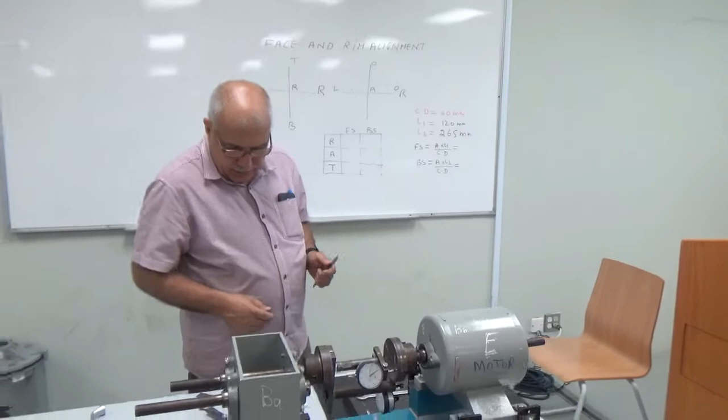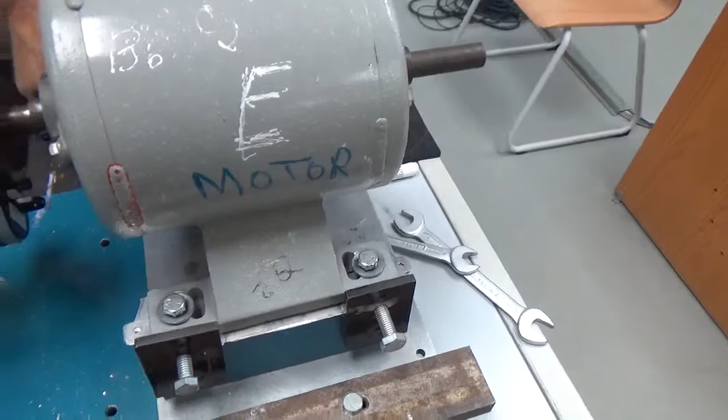For making alignment in the horizontal direction, what we will do is open these bolts here, all the bolts, so that the motor can move forward and back side. Which bolts? These are the four bolts. These should be all loose so that you can move the motor forward and back side.

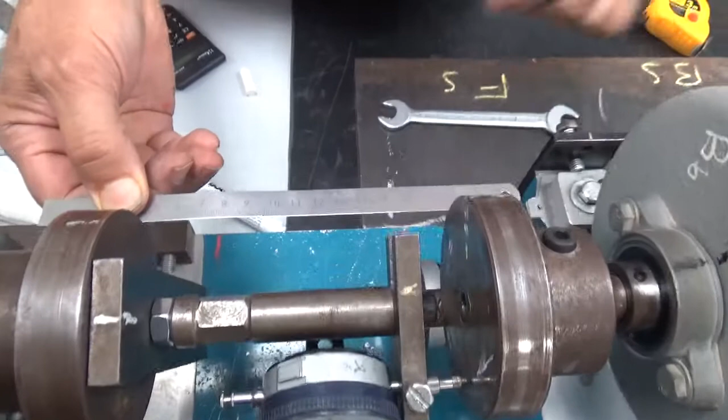After this, you will make here rough alignment. You can see here that I have already done the rough alignment. This is the rough alignment now.

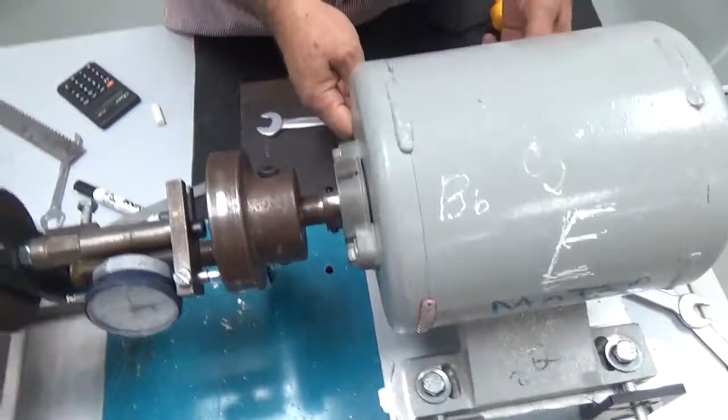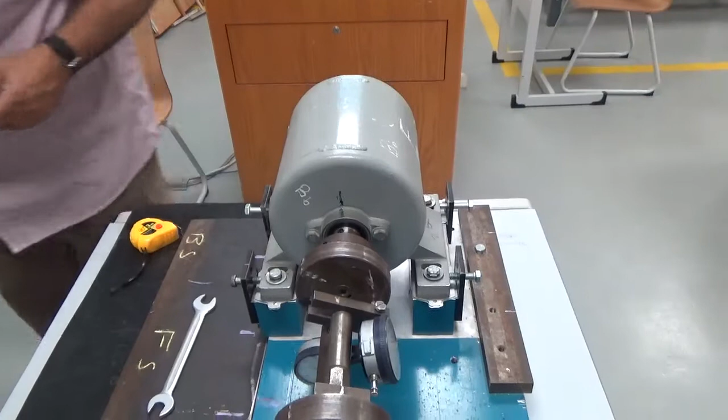After this, I will touch these jacking bolts so that the motor stays in this position. The motor should not change from this position. After this, I will just make this little tight, these bolts, so that the motor does not change its position.

No need to tie too much, just tight a little bit. Okay, now you have just tied them a little bit.

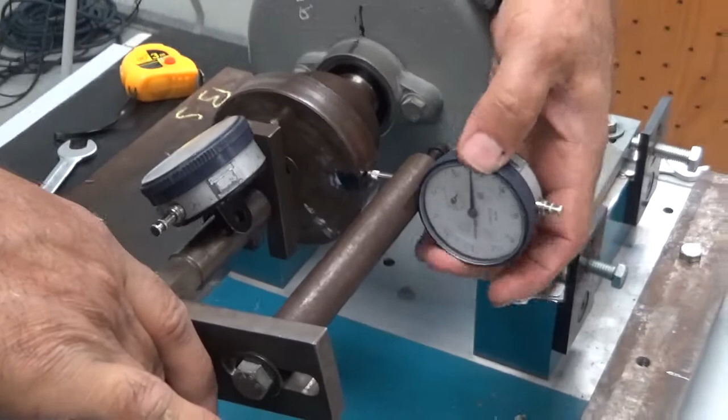Now I will take the readings. I start from the rim reading. I will make this 0 here. This is 0, you can see here. This one is 0.

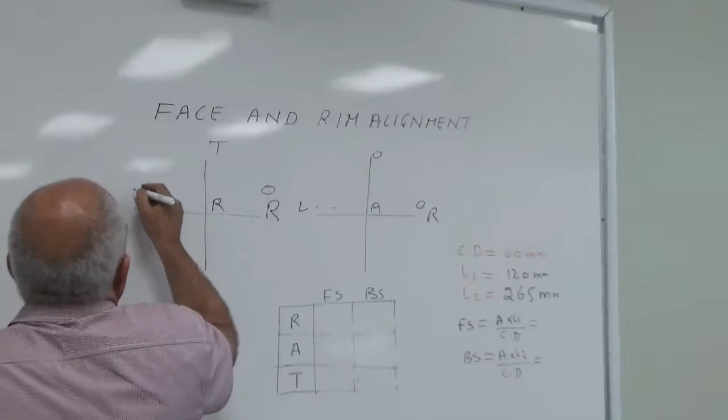I will come to this side towards me. This is now 100. This is 200. And this one is 250. This is 250. So this one is for 0 and this is 250.

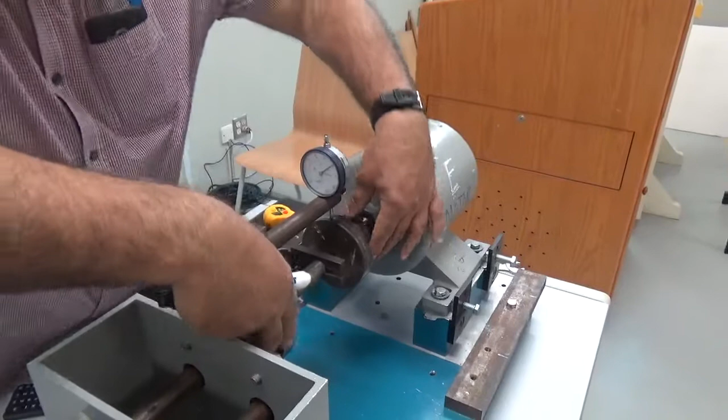Okay, so this was our radial reading. Now we will take angular reading.

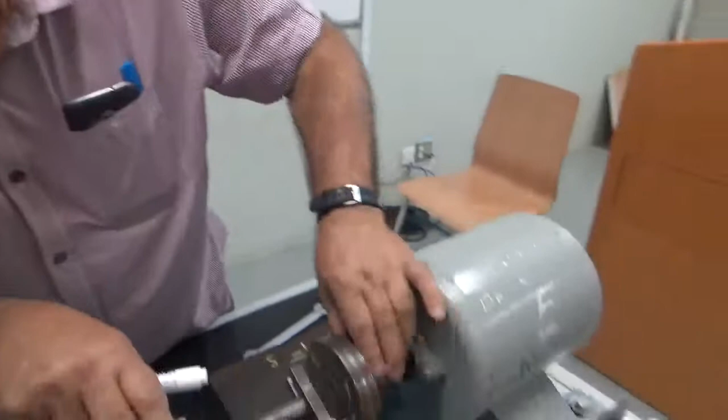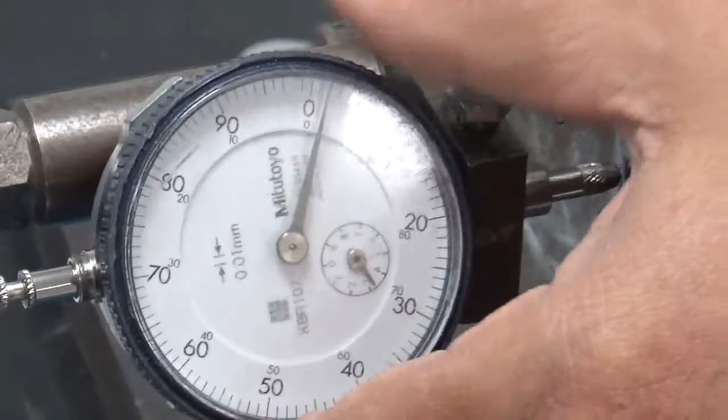This is our 0 here, and we will come to the opposite side. And this is plus 25. So this is plus 25.

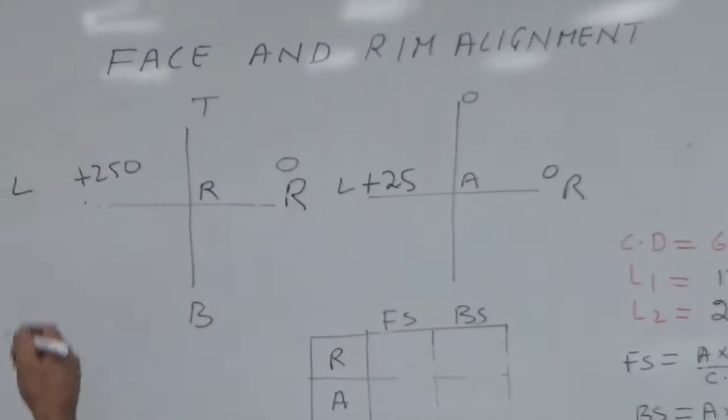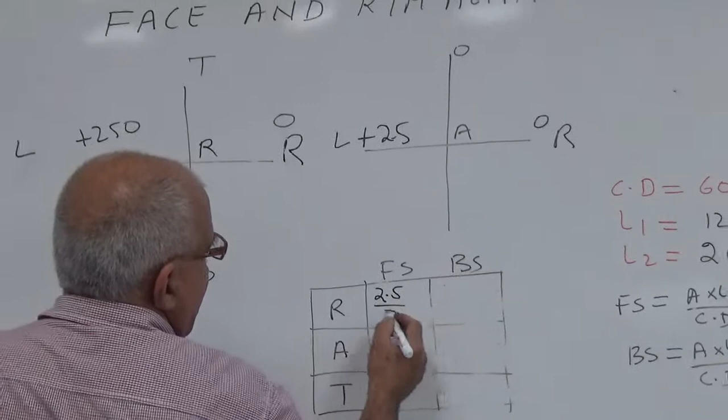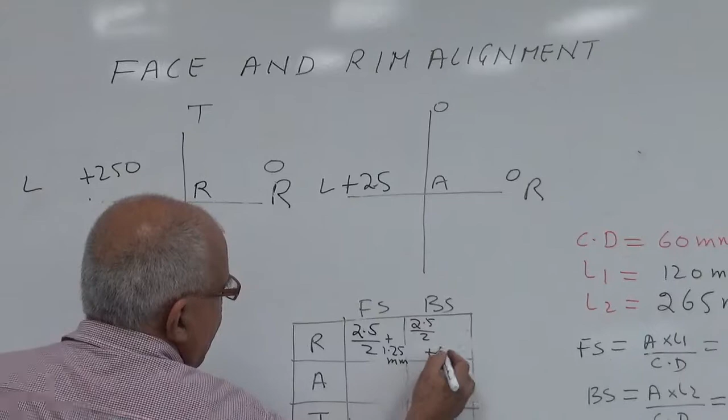So radial will be 250, 2.5 divided by 2. This is plus, and this becomes 1.25 millimeter plus, and same is here, 2.5 divided by 2, and this becomes plus 1.25 millimeter.

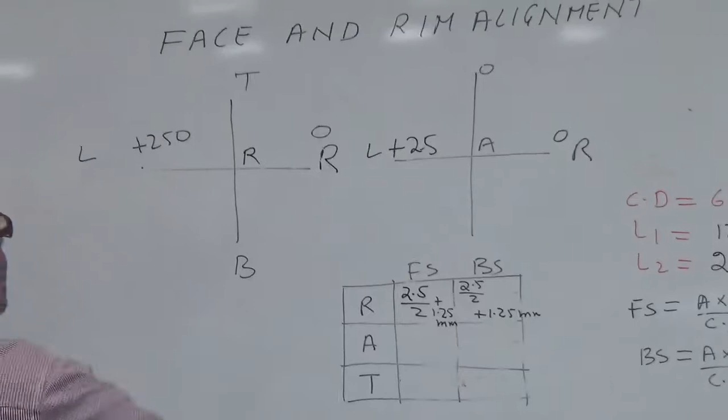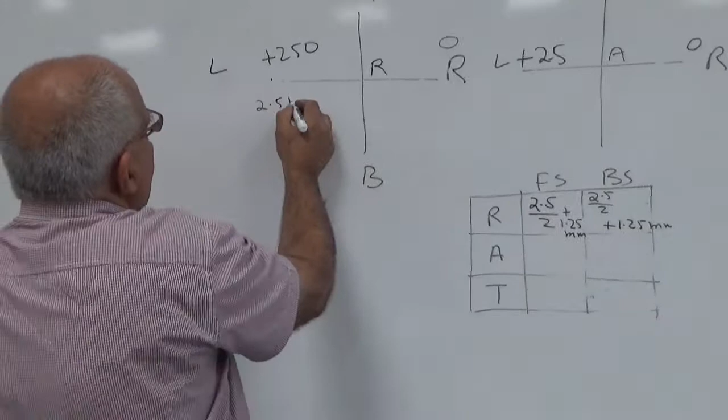This was for the radial. For the radial it is same, to rim reading we divide by 2. 250 is the dial indicator reading. We change it into millimeter. This becomes 2.5 millimeter, and then we divide by 2. So this is the correction for offset misalignment.

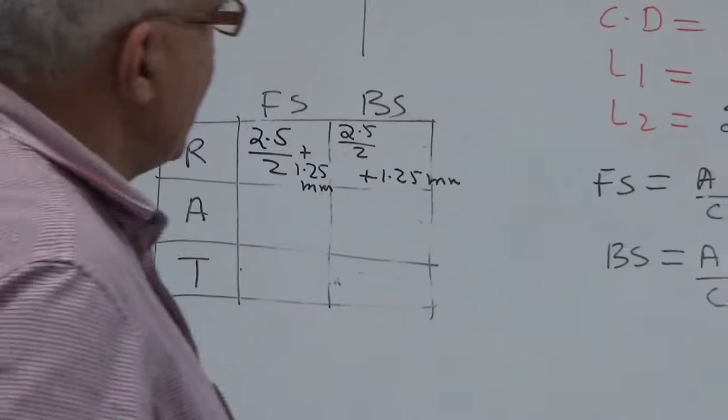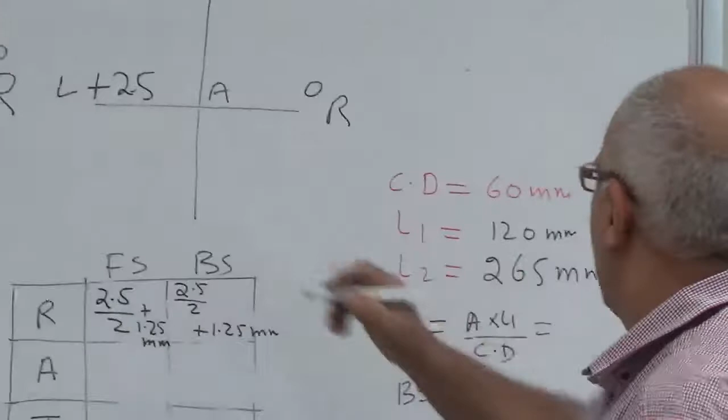1.25 millimeter, 1.25 millimeter. Now we will come for this angular alignment. So angular is 25, so this will become 0.25.

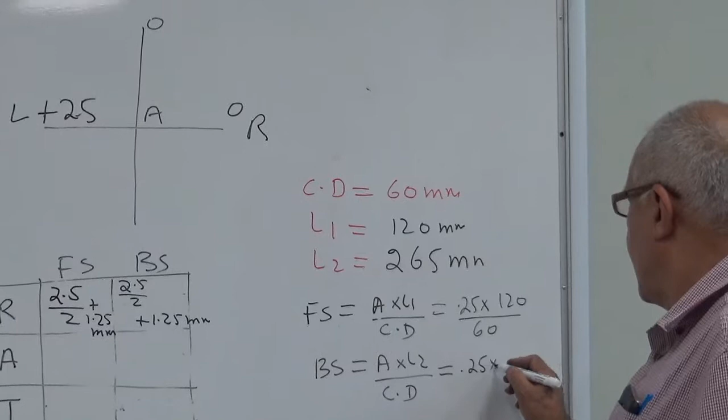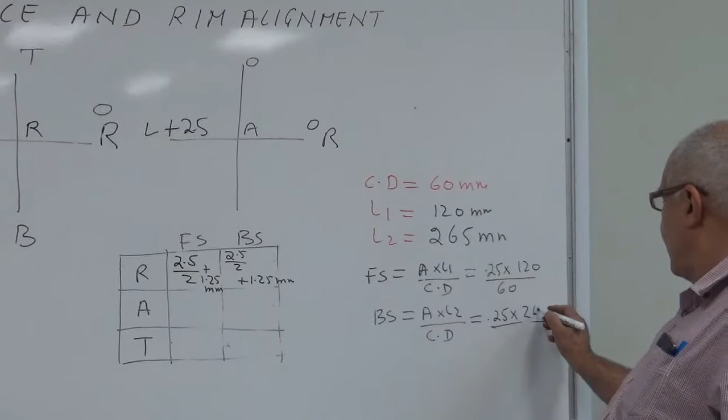0.25 into L1 is 120 over 60. This is 0.25 into 120. L2 is 265. So this is 265 divided by 60.

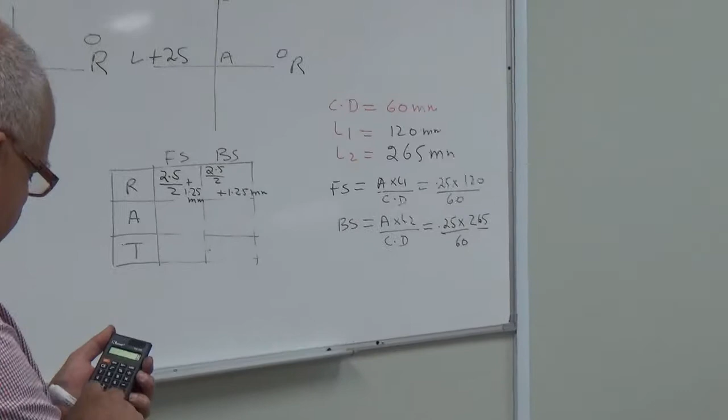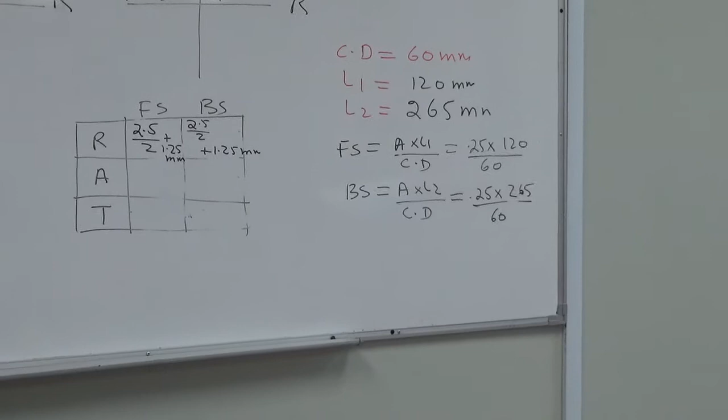So let us see what is the answer. 0.25 into 120 divided by 60. So this is 0.5 millimeter plus, and this one is

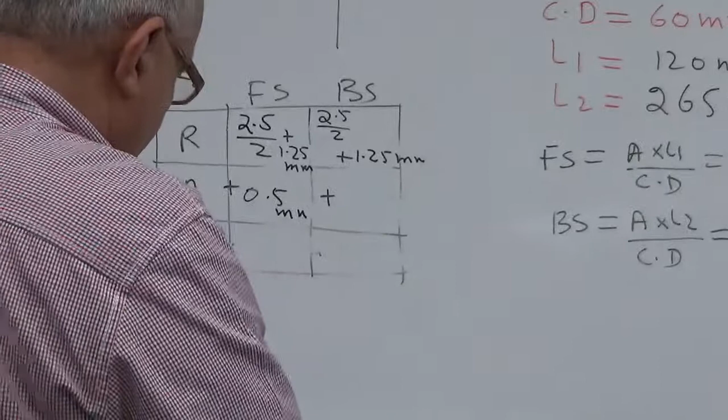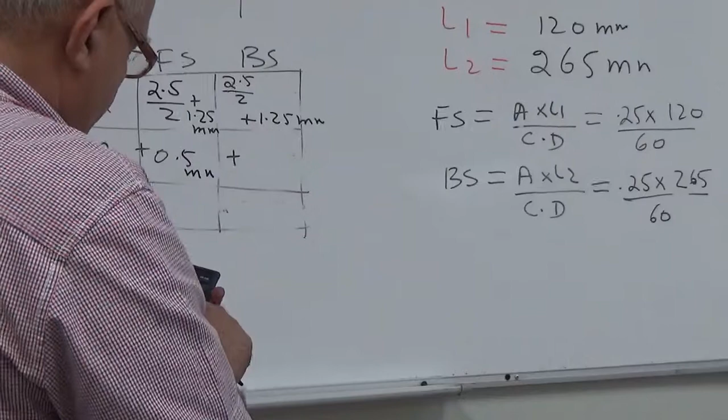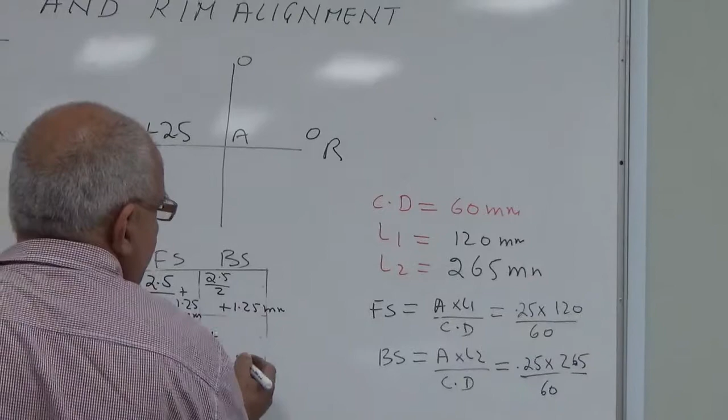0.25 into 265 divided by 60. This is 1.1 millimeter.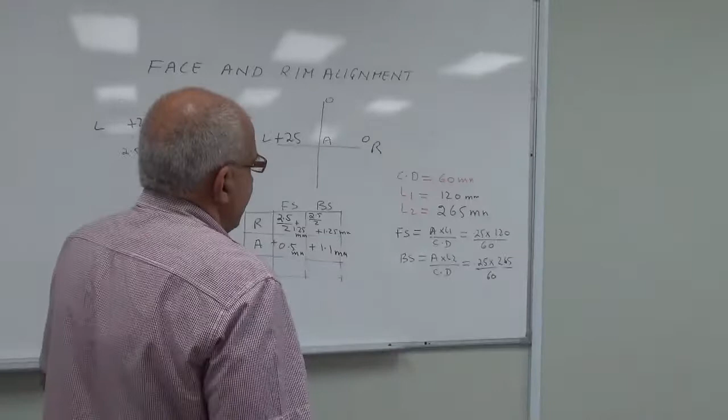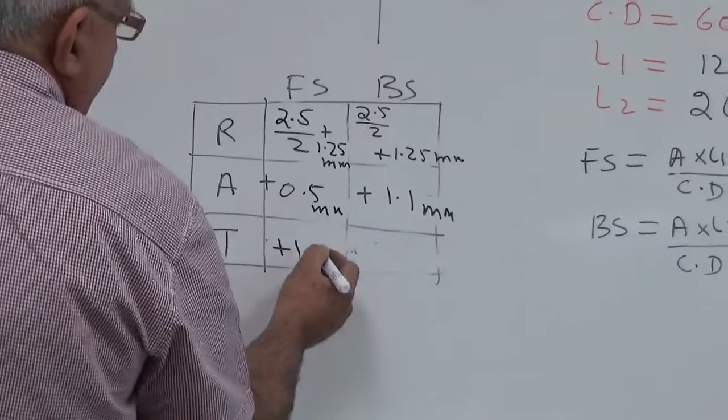Okay, now we will add them together. So this will become plus 1.75 millimeter, and this will become 1.35 millimeter total distance.

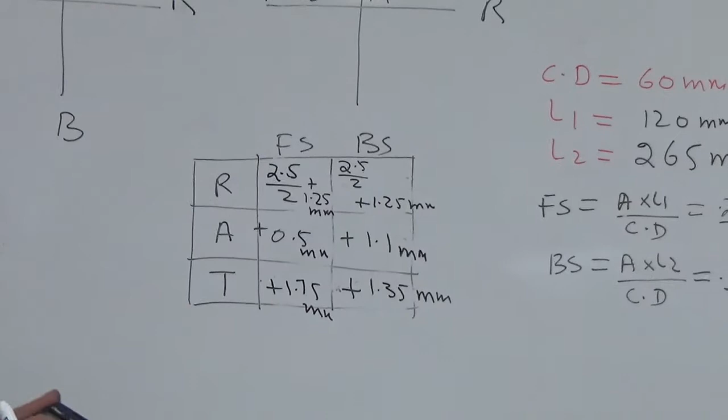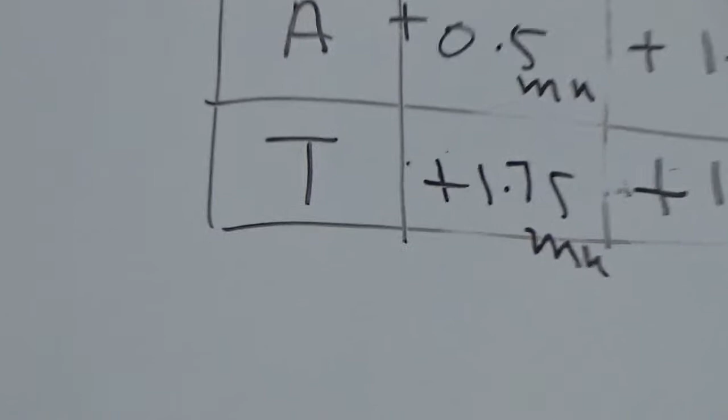So what we will do is, on the front side we will make a gap of 1.75 millimeter. We have to push it from the right side. You can see here, this is plus reading.

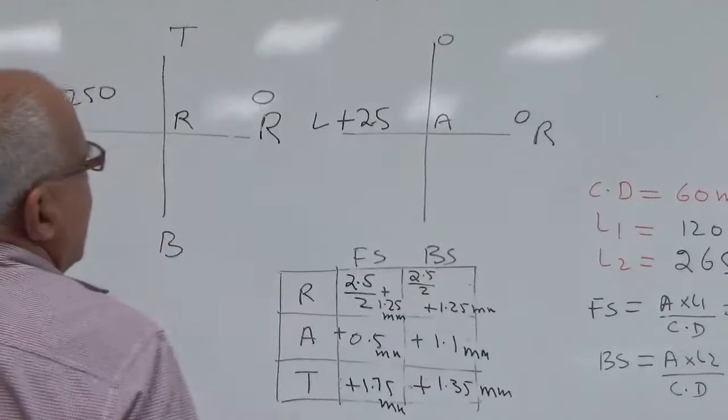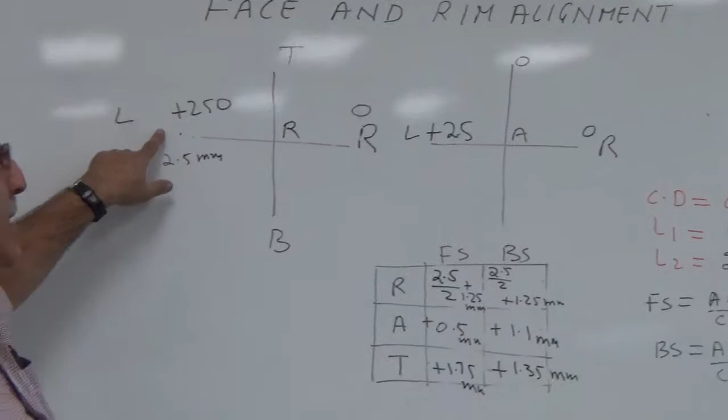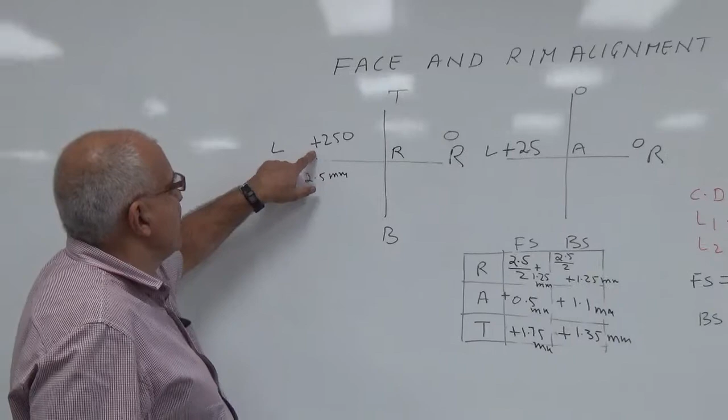We have to be very careful because here there is a plus reading, and here is also a plus reading. So we have to add the shim on the left side, both for angular and radial, because this is plus. You have to add the shim on the front side, and you have to add the shim on the back side.

On the front side you have to add shim 1.75 millimeter, and on the back side you have to add shim 1.35 millimeter. This is the front side here. This was our top, so I have to add shim here, how much? 1.75 millimeter here. And on the back side I have to add how much?

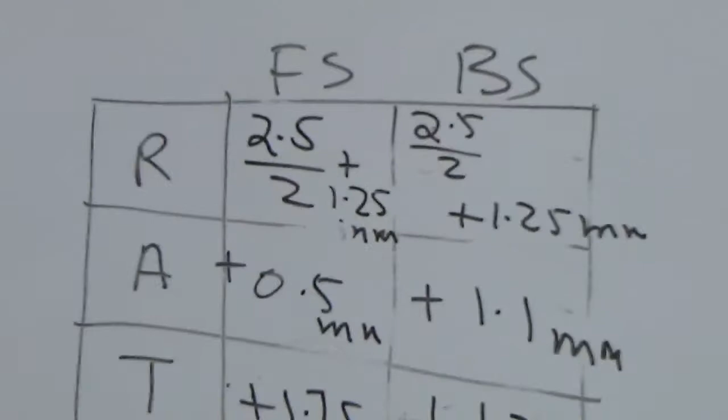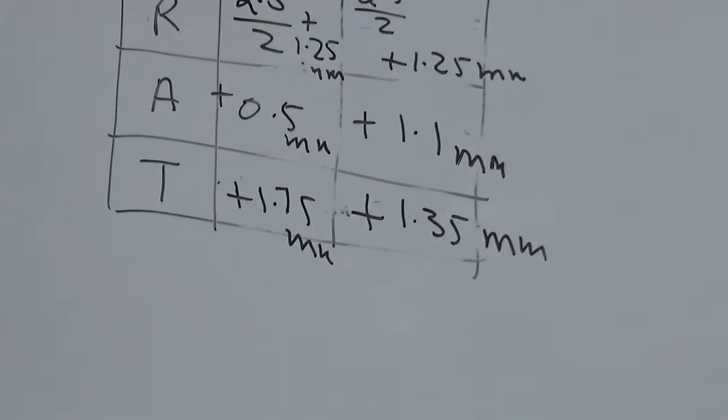Here there is a mistake. This was 1.25, okay, 1.25 plus 0.5 is 1.75 millimeter. Here it was 1.25 and 1.1, so this is 2 point. Here the answer will be 2.35 millimeter, 2.35 millimeter. So this is the answer here.

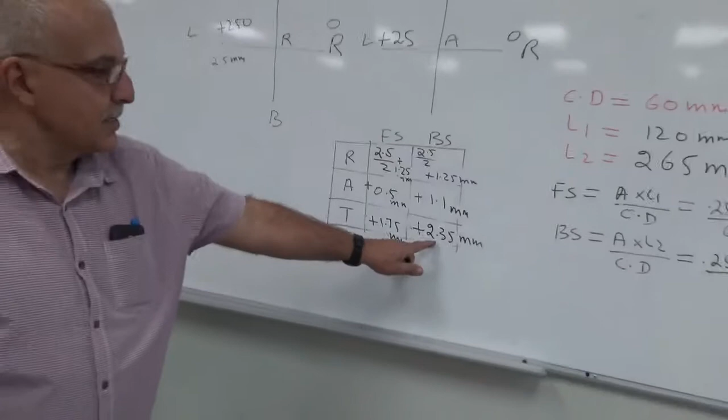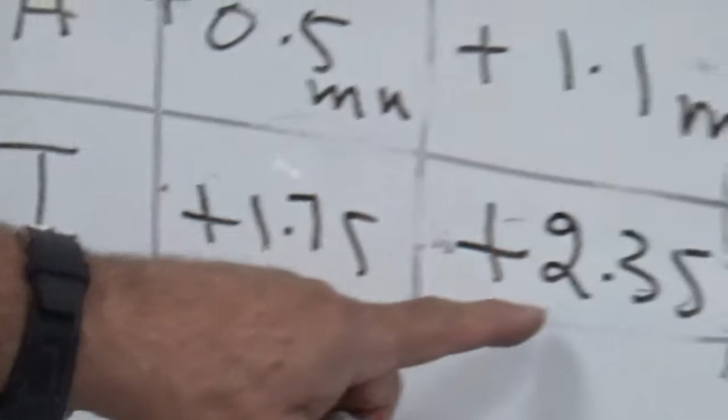Not before, there was a mistake. So now we have to push front side how much? 1.75 millimeter. And back side how much we have to push? 2.35 millimeter. From which side we will push?

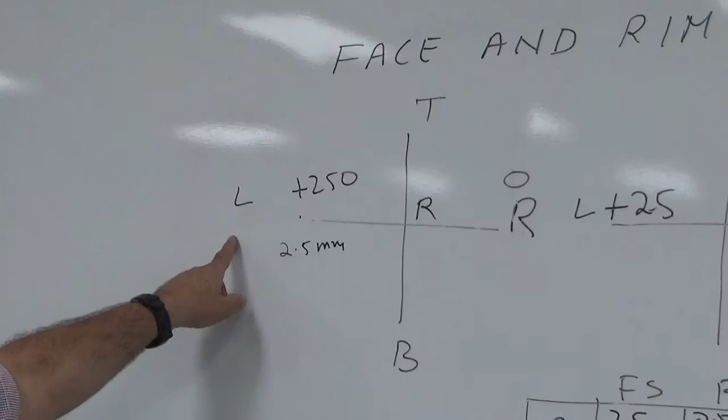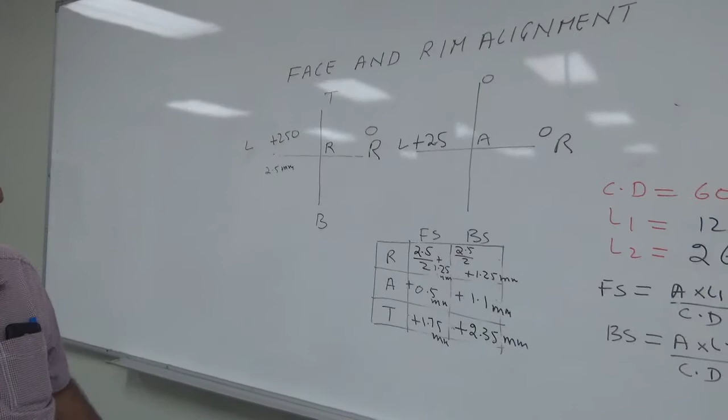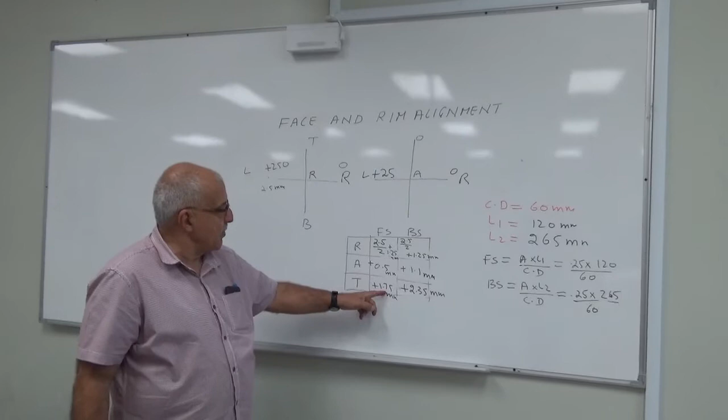From the left side we will push it. On the front side the reading is plus, on the back side the reading is also plus. So we will be pushing from the left side. Left side is the one where I am standing. So I have to push the motor opposite to me, 1.75 millimeter on the front side and 2.35 millimeter on the back side.

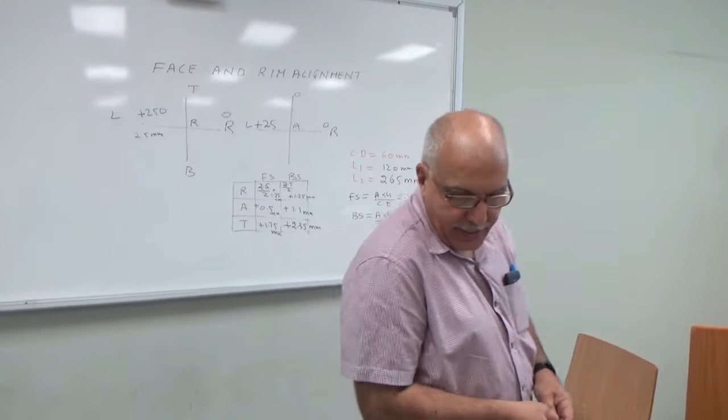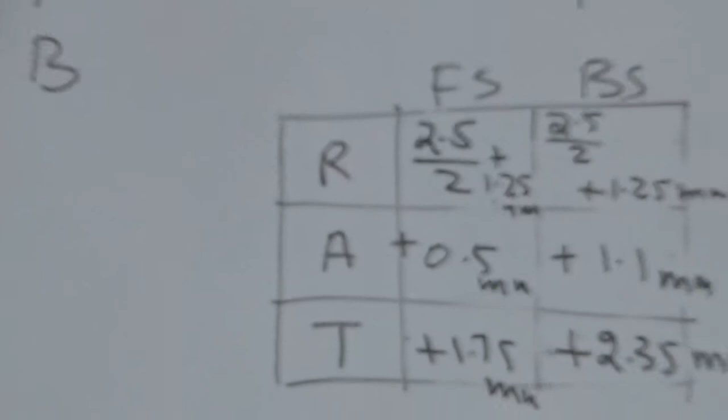Let us now, I have to make a gap here on the front side, 1.75 millimeter. 1.75 millimeter on the front side. So this is 1.75 millimeter.

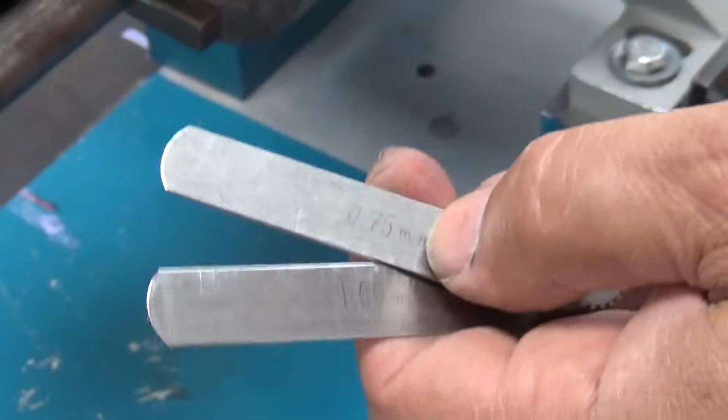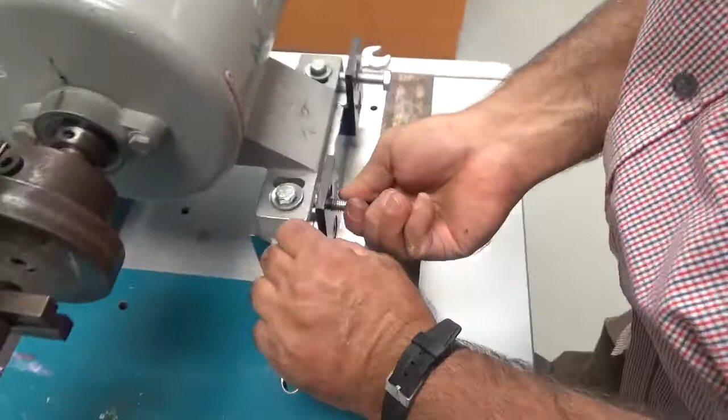You can see here, this is the feeler gauge, 1.75 millimeter. Now I will make a gap here, 1.75 millimeter. And on the back side, I will make 2.35, so 1.95.

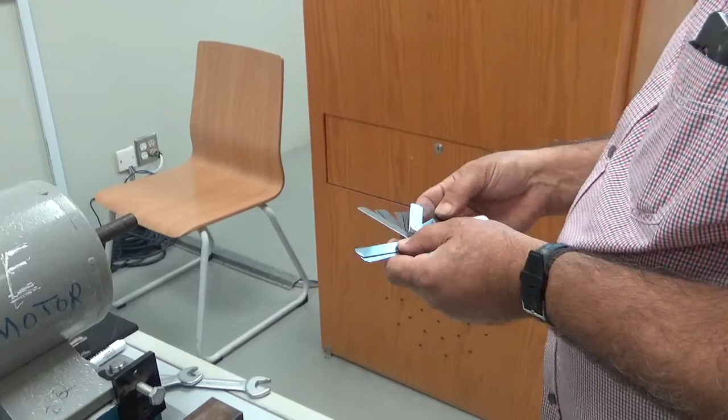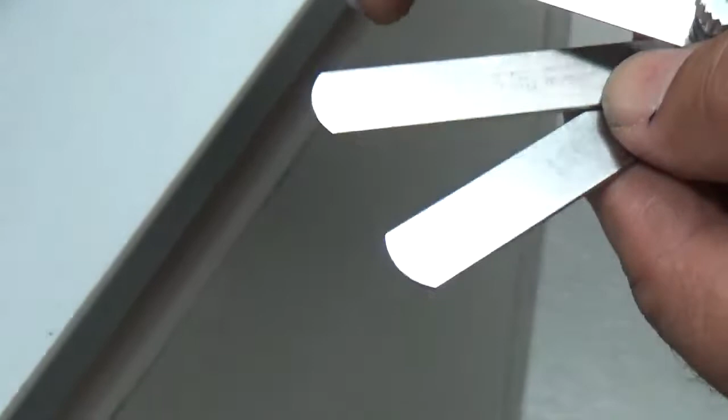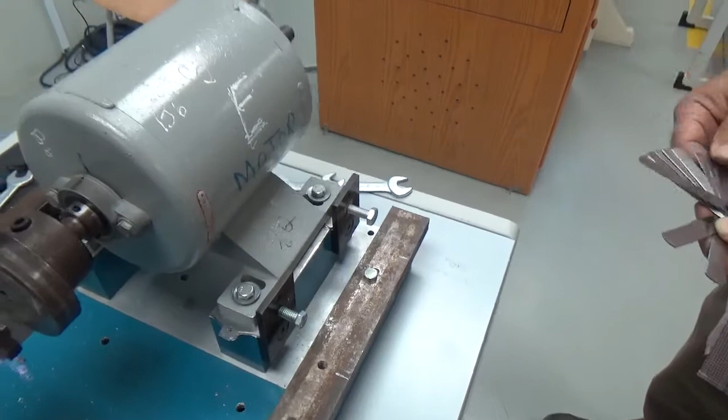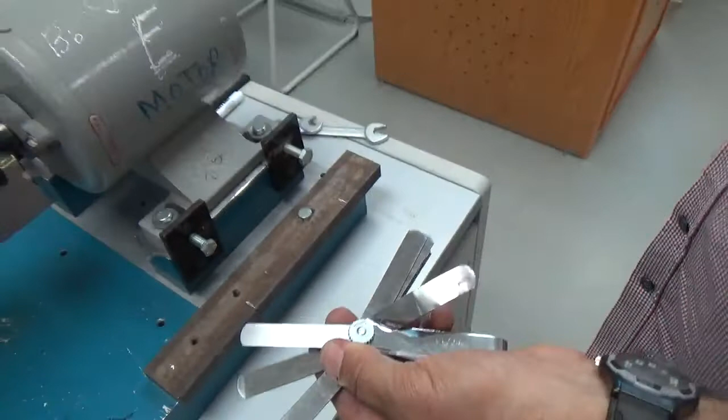Okay, so 1.95, 1 plus 0.95 plus 0.4, I have to look for. Okay, this is 0.4, so 0.4, 1 plus 0.95 plus 0.4. This becomes 2.35. So I will make a gap on the back side.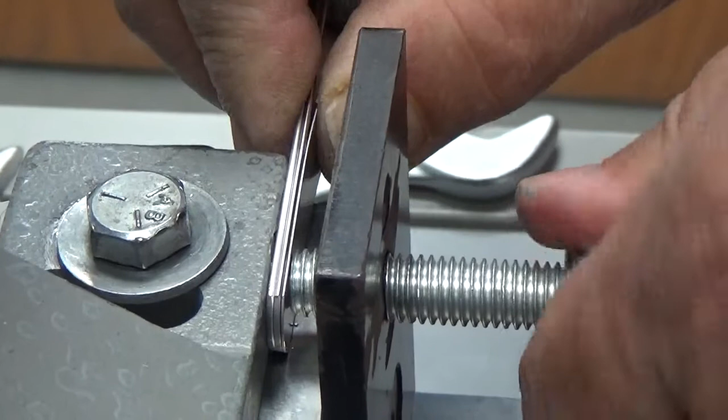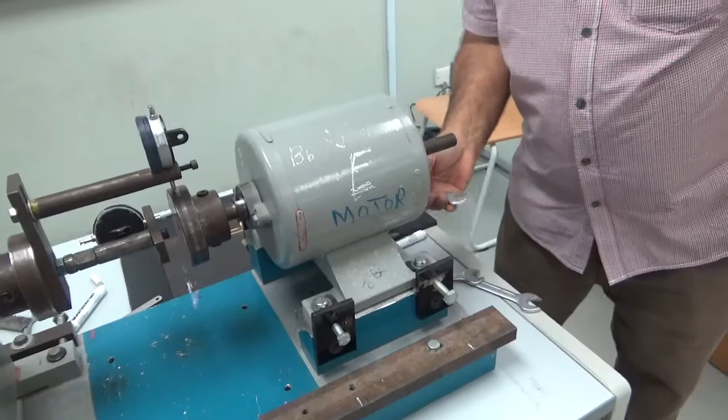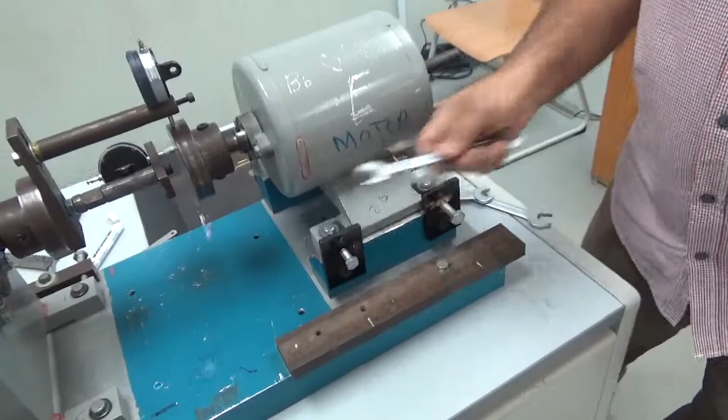Okay, now I will push from the left side. I will make these bolts loose. And I will push it.

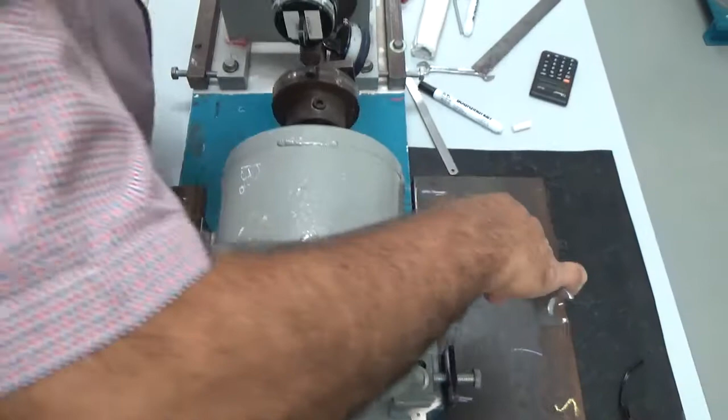Okay, now I have already pushed, so now I will tighten it. I will tighten it in 3 steps. Little tight this one, then little tight this one, then little tight this one, again then little tight this one, then again tight this one, then again tight this.

This was my second round. Now I will have the third round. We have to go opposite side. This is this side, then I go to this side, then I go to this side, then I go to this side. Okay, after this I will loosen my bolts, and I will check the reading now.

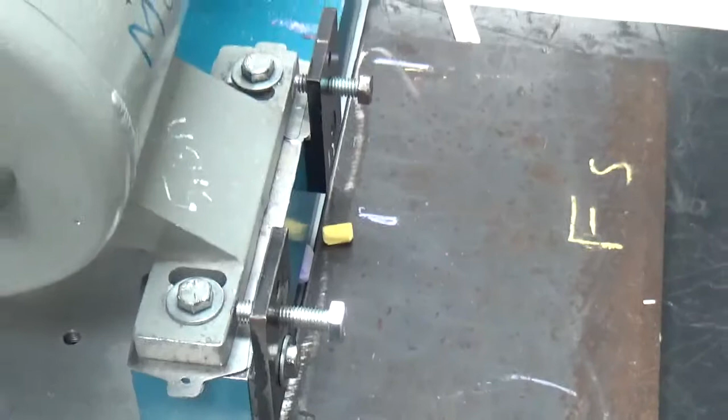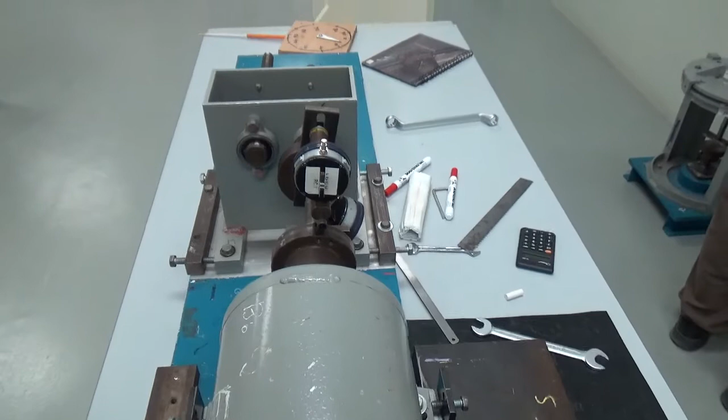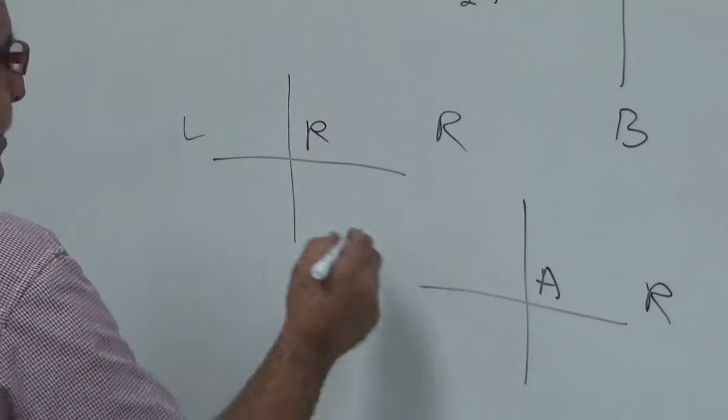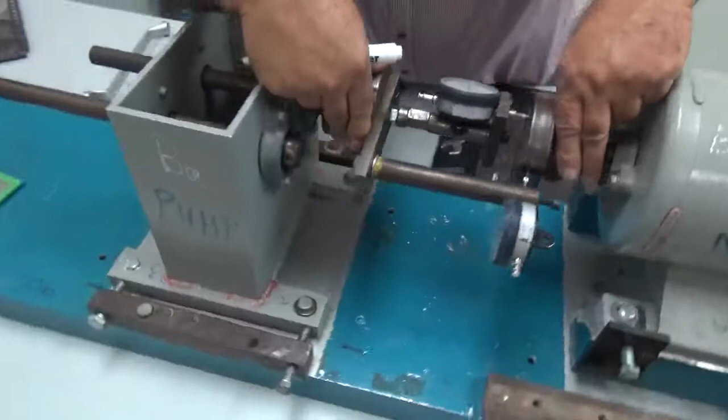What is the reading? Okay, so let us check the readings now. This is right side, this is left side. Okay, so this one is 0. Let us see what is the reading now. I make this 0 here. I will come here, and now the reading is minus 27.

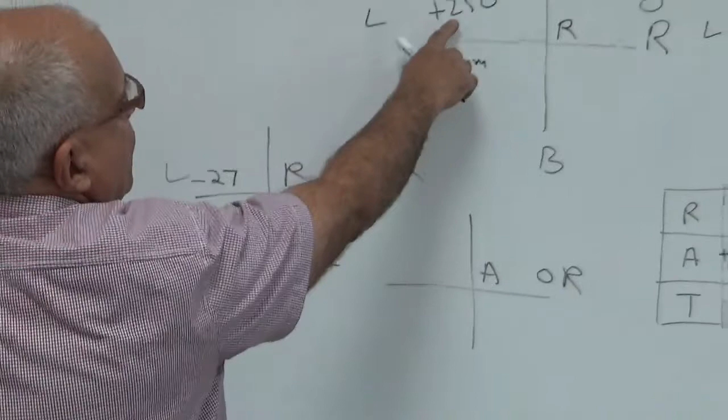Minus 27. So this reading here is minus 27. Before it was 250, that was too much. Now let us check the angular reading.

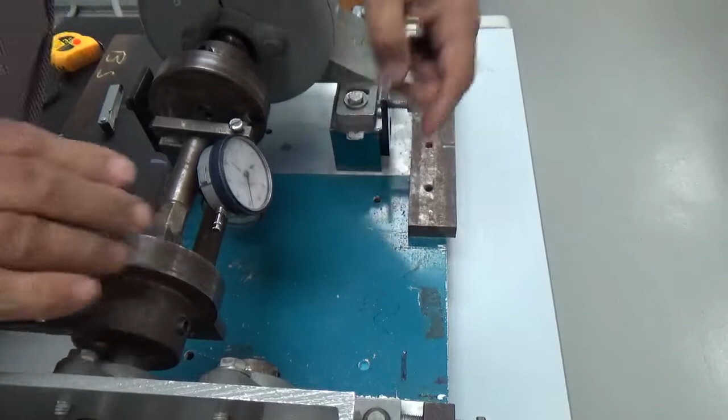Okay, I will make this here. Now I will come here on this side. There, okay, here also.

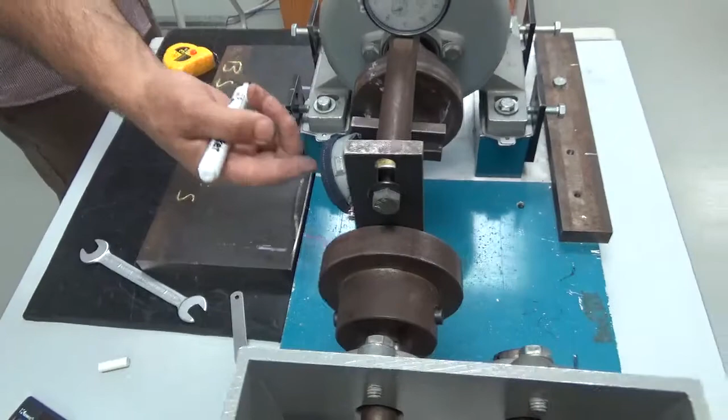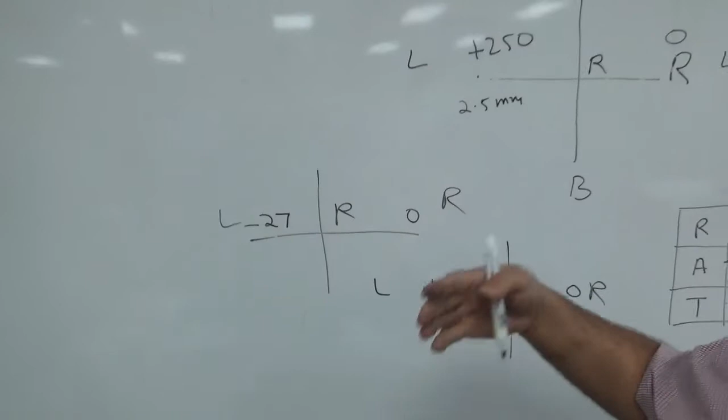This reading is, you can see here, is plus 3. So this is plus 3. Okay, you can see here that before alignment our reading was 250 here. Now it is coming here minus 27. So there is a considerable improvement. And same is for angular, before it was 25, now it is coming plus 3.

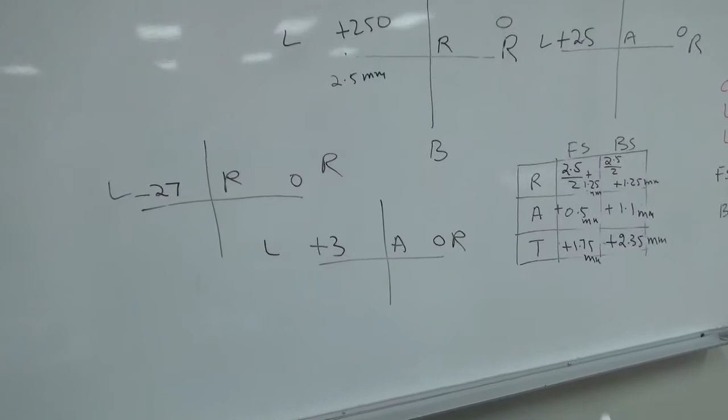Now it's a good reading, but you can do it a second time so that you can make this reading also a little better. This one, minus 27, it can become a little better. You can again calculate and get a better result. So stop for now.